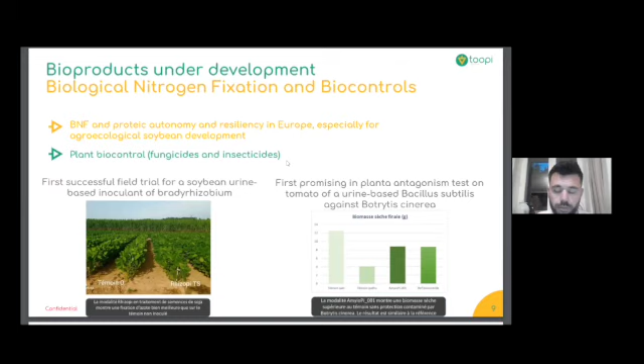And so now, last stage, urine collection. So because I didn't explain this, we use waterless urinals to collect urine as a growing medium. So obviously, we don't want to have water.

So we have lots of partnerships in France, but also in Belgium and other countries in Europe, thanks to toilet rental companies, but also some buildings and gas stations. We have partnerships with Vinci, for instance, in France, and we had the capacity to collect roughly, as I already explained to you, 3 million liters of urine to do our first production.

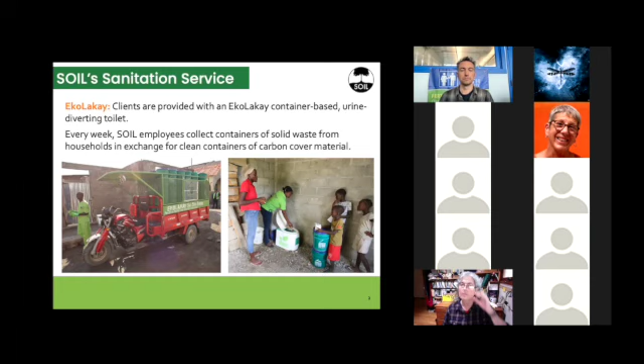We developed this ecological sanitation system called EkoLakay. It's highly mobile, it's installed in folks' homes, and it operates with a service. We do weekly servicing currently to exchange full buckets with our carbon cover material.

Our full cycle goes from collection from the households to waste treatment, which is really important in Haiti because only about 1% of human waste is treated in the country, and we treat basically all of that. All of our waste is transformed into high-grade agricultural compost.

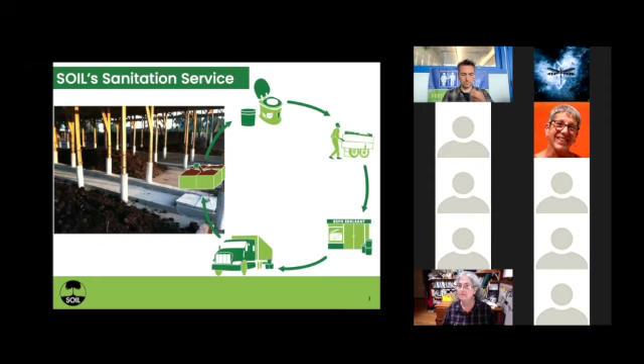One thing to note, since a lot of urine people are here, is that the urine in the toilets is managed mostly by the households in a socially acceptable way due to common use of chamber pots. So urine is discarded in a similar way to those overnight options.

Looking a bit more on the technical side, this is our current toilet. We use a handmade concrete base as the main structure. It's very durable, they typically last about 5 years. And then there are all these wonderful attachments or additions.

Our toilet seat currently uses a cut funnel for urine diversion. We use a 5-gallon plastic container for capturing feces, and the urine is diverted into a 1-gallon plastic jug. I'd include here that our most commonly replaced part is the toilet seat, which we buy locally or sometimes have to import.

As we've been looking at improving our service and customer satisfaction, which is a main driver for a lot of our technological exploration, we really wanted to improve the urine capturing, because the cut funnel, as you can kind of see in this image, only covers so much. In our journey to do this, durability has become really important when we're testing new materials and new models, making sure they hold up to use.

These are used in households. Our average household size from a recent survey was over 5 household members, and we know there could be even more using the toilet. Of course, it needs to be easy to clean. We want something attractive, and we're trying to grow towards mass producing these, and would love to do that in Haiti.

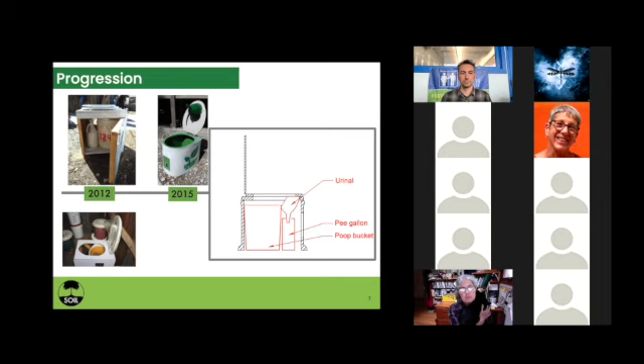Something we began around 2016, 2017 was, how do we begin to test some sort of improved urine diverter with this current toilet model that's working well for us? What you can see in this photo is the cut funnel attached to a toilet seat, and one of the prototypes made out of fiberglass in country.

So we had an initial rotomold made, and we tried doing vacuum seal molding over it. That plastic wasn't very strong, but we found local artisans that work with fiberglass. That's allowed us to create these prototypes and iteratively test different urine diverter models, and also make small adaptations to the mold where we're not eating the cost of a new mold each time.

That's been really important to us, because we've been able to test - you can see it here attached to a toilet seat, kind of a top-down view, so you can see how it overlaps with a bucket.

That's allowed us to test it in our offices with our many staff members and many external partners and guests. That's been really critical to get that feedback even before sending it out into the field with our customers, because their satisfaction is why we're on this journey in the first place.

With this improved urine diverter and our current toilet model, we have come across a major constraint, which is height - something we've lovingly called the 'nut ridge problem.' The height of the toilet is already relatively high for toilets on the market, in order to accommodate the 5-gallon feces containment container. What happens when you overlay the urine diverter on that is it ends up not having a lot of distance between the user and the urine diverter, and causes some dissatisfaction.

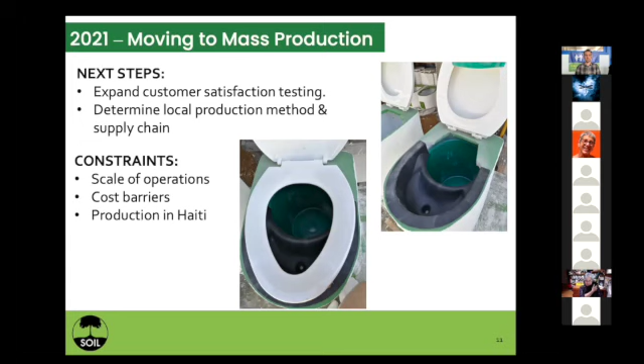But some of the big picture thinking that we have at Soil is really looking at what additional ecological sanitation options we can offer that might move our price point or our capacity to increase the cost of the toilet, to some of these more kind of all-in-one, highly designed models for some parts of our service. So I think that's all I've got for you today. Questions now or at the end of the panel.

Wonderful. Thank you so much, Jess. That was a great look into really the nuts and bolts of how to implement a system for a very particular context. We've been following the work in soil for a long time, and it's great to get an update from you on what's going on, especially these really challenging times in Haiti right now.

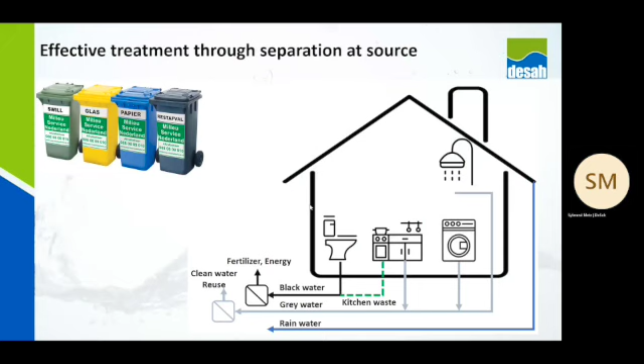If you look at the black water, it has a high level of organic components, so the concentration is relatively high, with a COD of 10 grams per liter, and this allows you to digest it. By digestion, you extract energy out of your wastewater instead of putting a lot of energy in through aeration to convert components into CO2. So by doing digestion, you generate energy.

Moreover, since you use vacuum toilets, the concentration of nutrients is relatively high, so it's very easy to recover nutrients like phosphorus and ammonium in the form of fertilizers. Since you treat black water in a digester with a relatively long residence time, you also remove more micropollutants like medicines and hormones, more effectively.

Since the gray water is less polluted, you need less energy through aeration to treat it. After treatment, gray water has a relatively high temperature, and you can use that for a heat pump to extract the heat and give it back to a district heating system, or to your house or a group of houses. After treatment, it's also very suitable for irrigation.

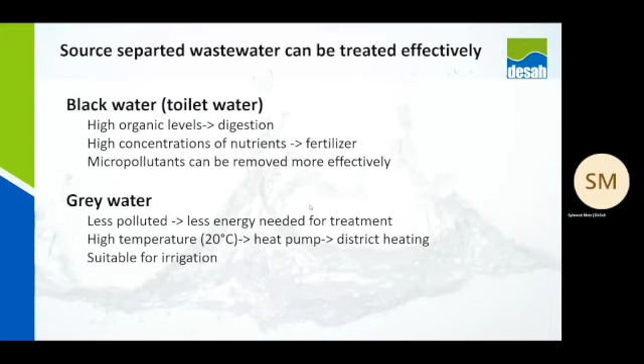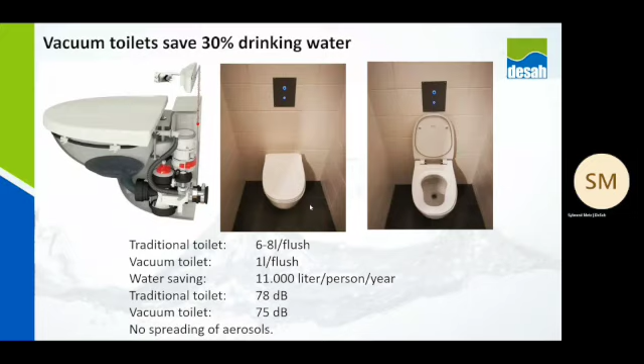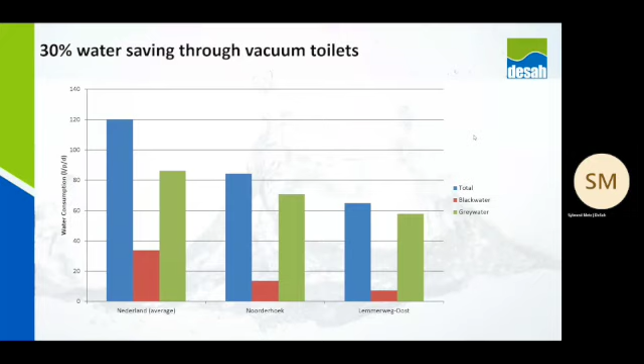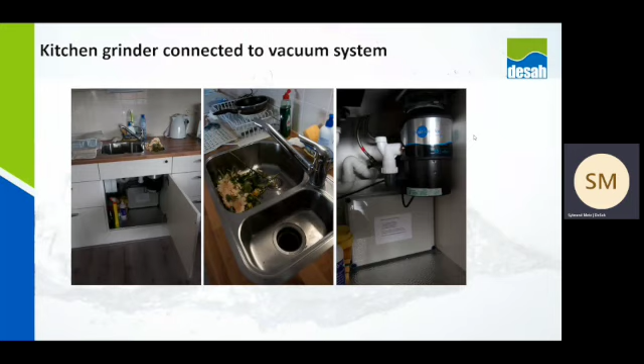In this case, we have a vacuum system and a vacuum valve. So the green waste is flushed to the vacuum system, which people in Noorderhoek find very convenient and very easy to use.

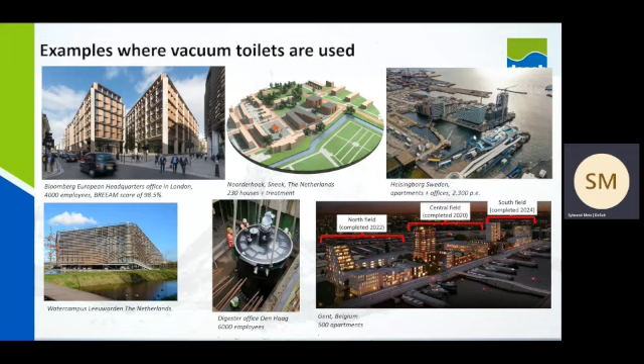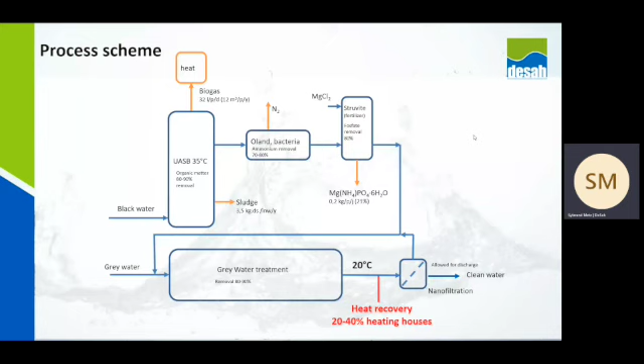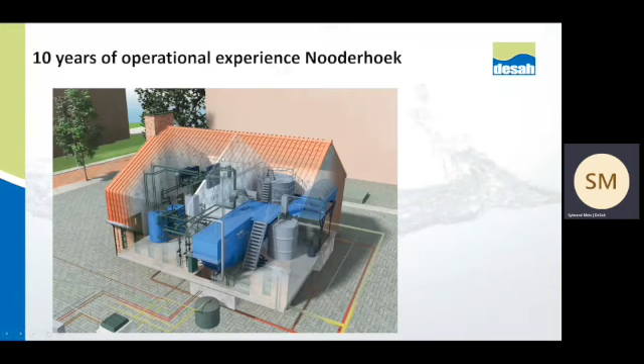On the back we have the digester, a struvite precipitator or Oland, and on the left side of this building there's the heating system with heat pumps and also the district heating system. So this building is divided in two parts: wastewater treatment on the right, and the energy part of the neighborhood on the left.

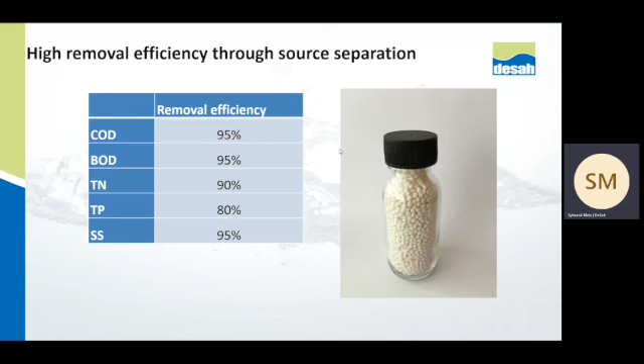So by treating your wastewater locally, and separating it at the source, you can recover very clean wastewater.

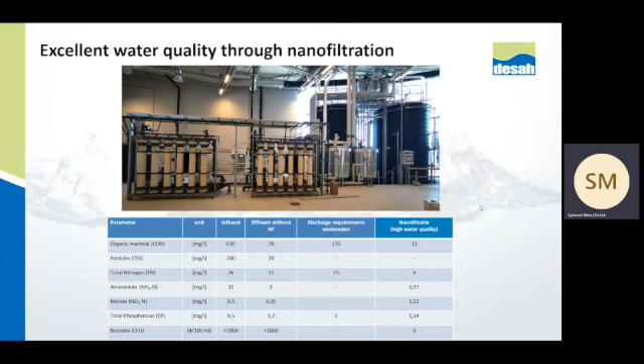So this is the question I always get, about the cost. We did some calculations, and this system becomes more economically attractive when you have a larger system. A lot of assumptions were made for these calculations, but this is for a situation in the Netherlands. These costs include investment cost, including the investment you have to do at your home by adding a vacuum toilet, kitchen grinder, and extra tubing in your house. It also contains the total investment in a vacuum sewer system and a grey water sewer system, and the investment for your installation and facility, including depreciation, maintenance and management of the installation, and the cost of consumables and electricity. So everything is included in the cost.

In the Netherlands, we have to pay taxes for wastewater treatment, about 60 euros per person, and also for the sewer we have to pay taxes. So it's about 120 euros per person in total to treat your wastewater, and that's comparable to an installation of about 750 persons.

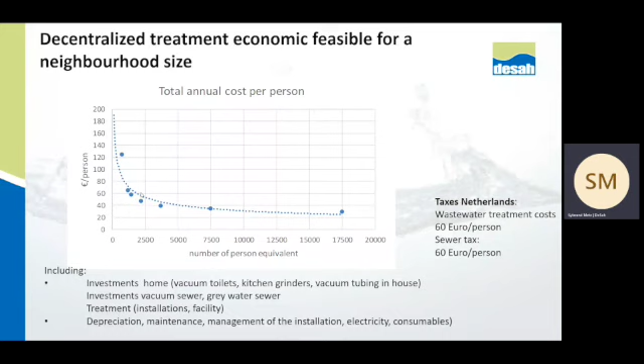So here are some references we have built as DESAH. We started in 2005 with our installation for 32 houses in Lemmerweg Oost. You can see on the left-hand side picture the treatment installation in the garage of one of the houses.

And we built some other installations also abroad. You see the installation in 2011 in Noorderhoek, where we treat wastewater of 230 houses, and this installation is still operational, so we keep learning a lot from it. You see here with the crane, this small black vessel, that's the digester being craned into the building.

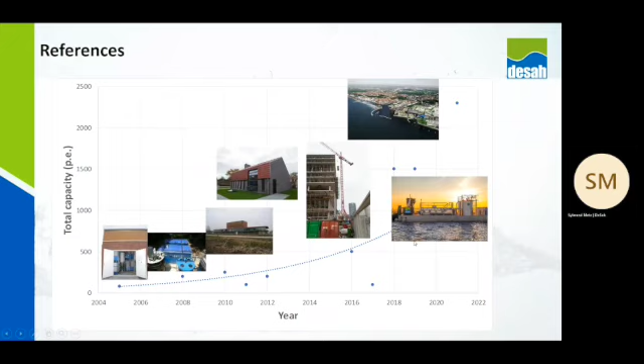And of course Oceanhamnen in Helsingborg, Sweden, but we also have our floating wastewater treatment plant for a project in Buiksloterham in Amsterdam.

And the take-home message, we're back at the beginning. You can treat your wastewater effectively and recover your energy, nutrients, and water by separating them at the source and treating them locally. You can save 30% of your water with vacuum toilets and green waste added to the system. You can produce more biogas, and recover your nutrients quite easily. Since you don't flush away a lot of cold water and mix it with the grey water, it's still relatively warm, so you can extract a lot of heat out of that. And the grey water after treatment has very high quality, which allows reuse, and you don't need a sewer system.

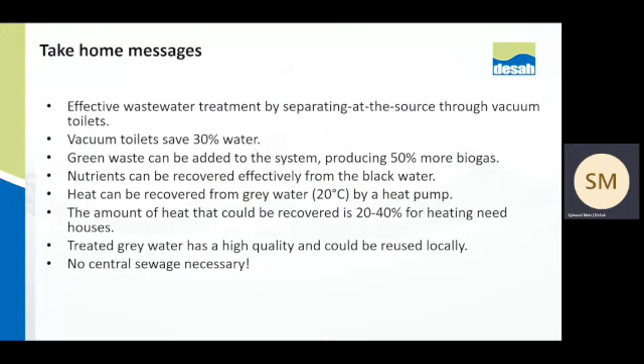Our next presenter is Kim Nace, presenting innovative technologies for capturing nutrients from source-separated urine or blackwater. Kim is the co-founder of Rich Earth Institute and CEO of Rich Earth Tools, LLC. Creating circular water and nutrient cycles from human sanitary waste should be low-hanging fruit as we humans attempt to live within the boundaries of our ecosphere. At Rich Earth, we recognize the need for new efficient methods that capture and process high-strength wastewater to better manage our precious critical resources. In this presentation, Rich Earth Institute announces a new spin-off, Rich Earth Tools, LLC, and the products we are bringing to market.

I just want to say how much fun it is for me to present at a conference that started upstairs in my living room in 2015. It's pretty exciting to see the evolution of that first group of 15 people that came together, and now here we are on many continents and many countries. I'm always inspired by the passionate group of people that gather for this event. Having been at all of these for the last 7 years, I've witnessed many collaborations that have come out of this event. So be hopeful and heartfelt that this event is an opportunity for more relationship building and collaborations.

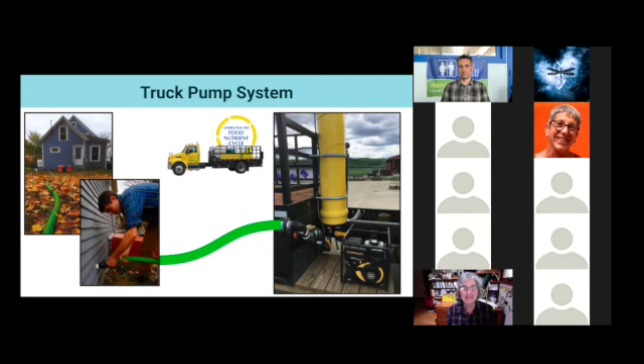I love this picture because it shows the pipe coming out and Arthur just hooking it up into the house, where one of our urine donors has a tank right in the basement. It's a very efficient method for picking up urine and transporting it. So let us know if you want to do this and you need our help.

The third thing on the list is our pasteurizer. Since the 2019 summit held at University of Michigan, several people raised their hand and asked, is that for sale? At the time it wasn't, and now it is. I'm happy to say we already have 3 customers expecting to buy a pasteurizer from us in 2022. If you have a community collection system or any kind of urinal going in that's going to have a tank to collect, let us know. We are building these.

25 gallons a day is roughly 10,000 gallons a year, and that's about the average — about the amount of urine you would collect from 100 people. So this gives you a sense of what this would be for.

Time and temperature. One thing I'm very happy about: our first 3 customers are in 3 states, not Vermont — one is Michigan, one is New York State, one is Massachusetts. It's exciting to see the possibility of urine treatment out in these other states. It's going to push regulation as well.

Our final system, which we're also very excited about, is our building scale concentration system. Everything inside the gray box is part of the system — the toilets and how the collection comes in — the other gray water is not part of it. We are developing freeze concentration, and the pasteurizer goes along with this for a building scale system.

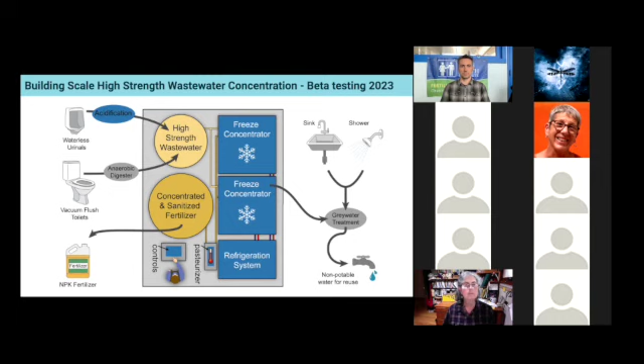I do want to point out that, like Sybrand's talk in the last video, we are not just looking at urine for this freeze concentration — we're also looking at the effluent from the anaerobic digester, from high strength source separated black water with the vacuum flush toilets. So we're moving along with this technology.

This is just a timeline of how we got started. We have a couple patents, and in 2020 we received our first funding from the National Science Foundation, from the SBIR program, the Small Business Innovation Research Program. We're winding down that grant and hopefully going to be selected again for phase 2 in 2022, which will help us get this freeze concentration system to beta testing by the end of 2023.

You can see down here the cost of the system is very much an estimated cost, $67,000 for the freeze concentration system. We will know much more about that by the time we're ready for the beta testing.

We are currently seeking investment funds. We're doing some pitches regularly now with different people, so if you would like us to pitch to you, great. If you know someone you think would be interested in investing in this new technology, please feel free to send their information to me or connect us.

The last thing I wanted to say today was that I really get excited about this summit, and I also get excited about the idea of getting pilot projects out in the world. As Lynn was saying this morning, and others have, and Jay Garland was saying, you know, we've got to see it.

I believe that very strongly. I was at the GIZ webinar in early spring this year, 2021, where they were releasing a report called Sanitation: The Underutilized Driver to Achieve Urban Climate Resilience.

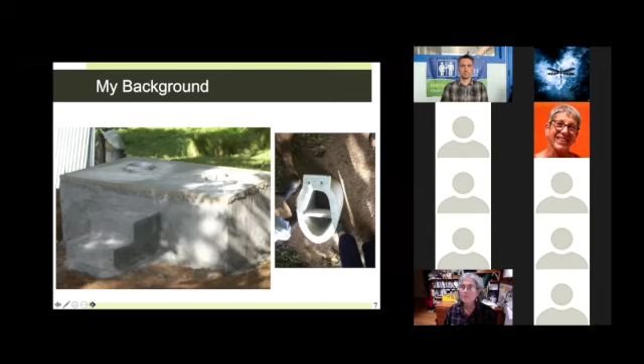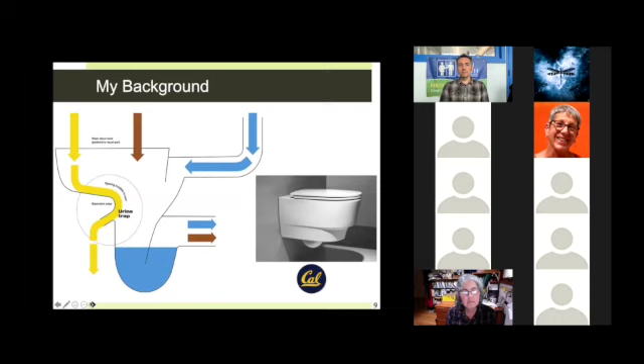In my postdoc recently at the University of California, Berkeley, in 2019, we worked with Sanergy. Here's Sanergy's Fresh Life toilet, a similar effort where urine is collected as well as feces. Following the conference here with Rich Earth in 2019, we looked at installing a pilot urine diverting toilet on the UC Berkeley campus. Here's a picture of the Laufen toilet installed: the urine is separated with the urine trap, and the feces and flush water go down differently.

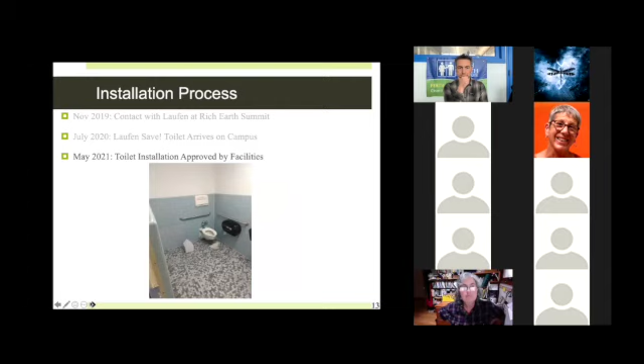So the installation process started back in November 2019. I believe this is the last time we all got together. During this process, I was able to make contact with the representative from Laufen, and after that we got many boxes at the University of California, Berkeley with some of the different Laufen toilet components. That was about 8 months later. Then eventually, almost 10 months after that, partially due to the pandemic and partially due to bureaucracy of working on a university campus, the toilet installation was finally approved.

Just a couple months ago, we are finally working on the actual design for professional installation, because we found out that this is not a simple process and facilities needs to be involved, and there's lots of things that go along with that. But the basic idea is that the source separating toilet will be on the 4th floor.

There'll be a urine storage container on the 3rd floor, a ventilation pipe, and we can use this urine for research. So instead of just collecting urine in individual containers, or perhaps a plug for Rich Earth Tools using one of their 5-gallon containers, our idea was we'd actually have the source separating toilet so we could collect urine from many more people than we would just with individual containers.

So you can see that the toilet installation is finally set for spring 2022, but this is a very long timeline, much longer than I anticipated. I expected this would be up to a 1-year process, and you can see it'll be about 2.5 years.

So looking at some of the challenges and opportunities, I feel like there are 2 main challenges: one is lack of existing regulations, and the other is the complexity and cost of retrofitting. This is a paraphrase of one of the comments we got from our facilities team. Again, this is on our research campus, but facilities said, if there aren't any standards, we can't install this. So we had to persuade them, saying this is a research project that has been installed in other places, but the lack of existing regulations was a barrier that caused some delays.

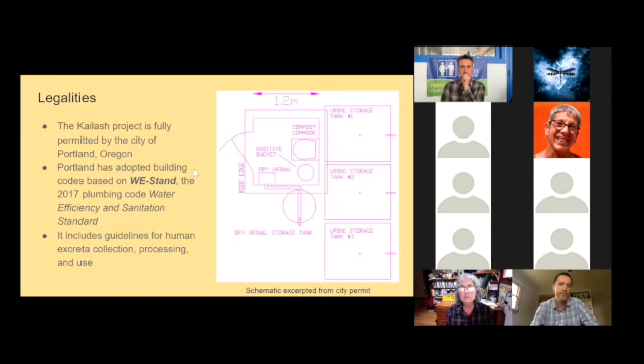So in summary, urine recycling in a dense urban setting can work. It saves water and otherwise wasted nutrients. It's safe, and it's becoming socially acceptable, or maybe I should say more socially acceptable. It's still an area of squeamishness among the general public. The plants, of course, love it, and it can even be legal, and it's definitely fun. So thanks for your attention. For more information, you can check out our website. There was also a recent video on YouTube that describes our project in a lot more detail. Thanks, everyone.